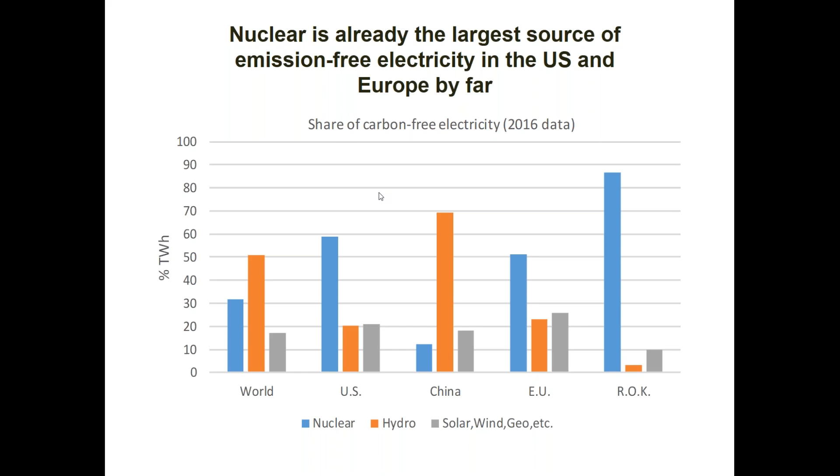anything like that. And you can see on a global level, hydro takes about half of the carbon-free electricity, followed by nuclear at about 1/3, and then less than 20% for solar and wind. But as I said, in places like the United States or Europe or even the Republic of Korea, nuclear takes up already a much greater fraction. So it is very much an important component of the carbon-free electricity mix right now. So let me move on.

It's interesting also to look at the correlation, if you wish, between the use of nuclear, hydro, solar, and wind to the carbon intensity in the power sector. So I'm going to define carbon intensity in a minute, but first, let me explain what you're looking at now. These are the list of European countries, and they are ranked according to the share of essentially solar and wind generation over a period of a little bit over 1 year, between 2016 and 2017. This is not capacity, this is actual generation.

Over that period of time, the average share of electricity from solar and wind in Europe was about 20%. That's the yellow line that you can see here. And there were 6 countries that were at or above that average. They are Denmark, Ireland, Germany, Portugal, Spain, and Finland. These, by definition, are the countries that have invested the most in renewable energy, particularly solar and wind.

The next plot here shows the same countries, all the European countries, but now they're ranked according to their carbon intensity. Carbon intensity is the amount of CO2, carbon dioxide, that is emitted per unit electricity generated. So the figure of merit here is grams of CO2 per kilowatt hour. And you can see that the 6 countries with the lowest carbon intensity in Europe are Norway, Sweden, France, Switzerland, Finland, and Belgium.

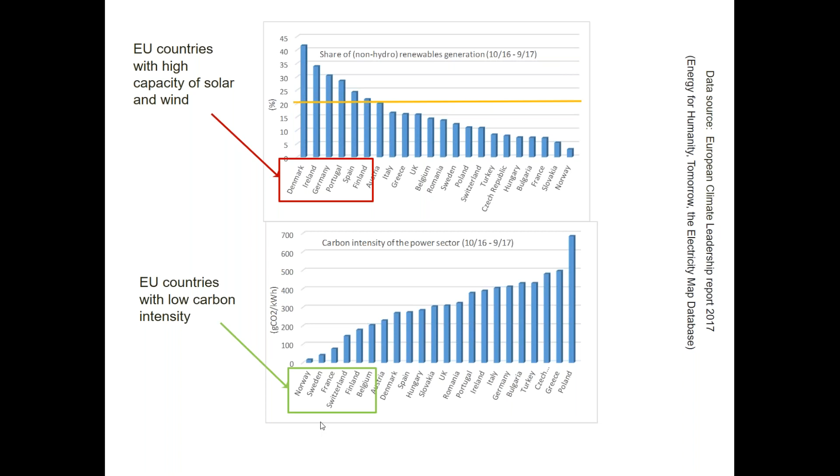So the message here is that, at least looking at Europe, which is an important experiment with many different energy policies, some completely at odds with each other, but with an integrated continental grid, the conclusion really is, looking at the data, that low carbon intensity correlates very well with the use of nuclear and hydro. The 6 countries that you see down here in green heavily use either nuclear or hydro or both.

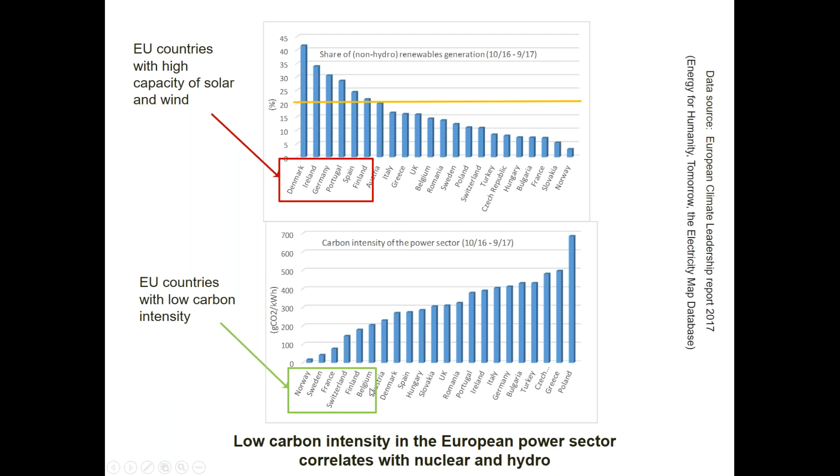Let me move on to the next slide. So we do have this fleet of nuclear power plants, and in many cases, these plants are approaching the end of their original license. You may know that nuclear power plants are typically licensed when they're built to last for 40 years. There is now a trend, I think, worldwide to extend to 60 years. That has happened extensively in the US. It's probably happening in Europe and in Asia.

And actually, here in the United States, we also have a few plants that may extend from 60 years to 80 years. But the question is always, once you get to this sort of decision point, are we going to decommission or are we going to extend the license? So if you decommission, there are certainly some downsides to this. The first is you lose the jobs and tax revenues that are generated by these plants.

This is particularly important for plants that are built in areas that are economically not particularly developed, particularly the states here in the US or regions of Europe. They place high value on the fact that nuclear power plants employ a lot of people. These are well-paying jobs, and they also pay a lot of local taxes. So you're going to lose that.

And we have examples here in the US and elsewhere of carbon dioxide emissions increasing if nuclear power plants shut down. In the US, we had, as of now, 3 or 4 plants that have already shut down: Vermont Yankee in Vermont and San Onofre in California. And when those plants were shut down, the annual emissions in the power sector of those states went up. This is fairly obvious to understand.

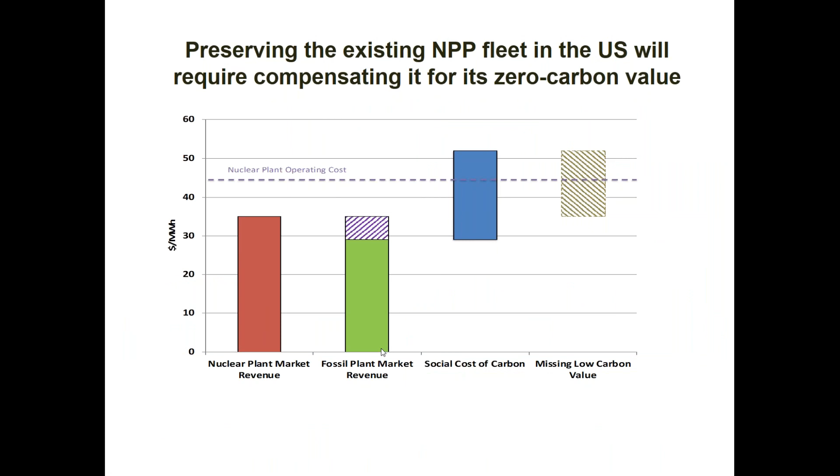This is the calculation for the United States. I'm not going to get into the details here. In the US, the issue is not necessarily the extension of the lifetime of the nuclear power plants, because in some cases they've already been extended by 20 years. The issue in the US is that many nuclear power plants, particularly in deregulated electricity markets, are losing money. Essentially, they're producing electricity at a cost that is slightly higher than the price of electricity in that market, okay? And so they are unprofitable.

So in the case of the US, again, without getting into the details of this graph here, we calculated that a credit, it's called zero emission credit, given to nuclear power plants in the amount of between $12 and $17 per megawatt hour would essentially make our entire fleet of nuclear power plants profitable, and it would allow it, therefore, to continue to operate for the next 20 years.

Similar calculations have been done by individual states in the US, New York, Illinois, and New Jersey. They have reached the exact same conclusions, and so in those 3 states, as of now, the nuclear power plants are actually receiving a small subsidy of between 15 and 20, I think, dollars per megawatt hour to ensure that they are profitable and they can continue to operate. This is done in the name of avoiding emission increases that would be certain if you shut down the plants and replace them, as I said, with other capacity.

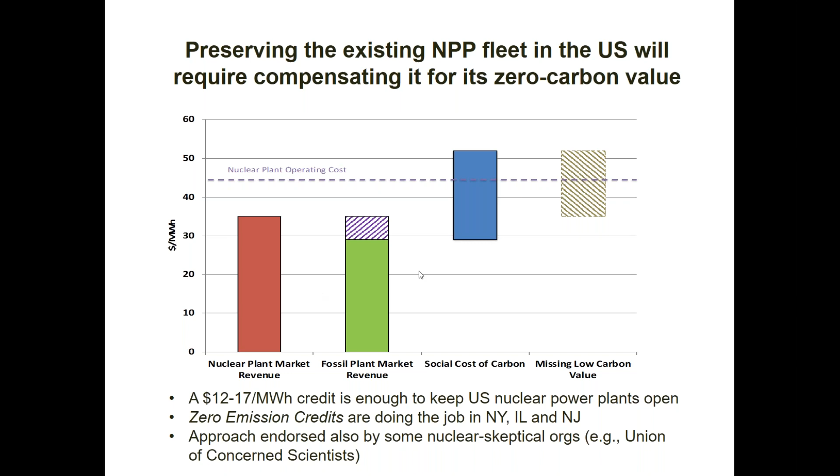So the discussion that we've had so far is about the existing fleet. Now, if you look down the road over the next 20, 30 years, the question is, do we need to build more nuclear? And so here we're now talking about deep decarbonization. You see, it's actually fairly straightforward, particularly for countries that start with a mix that is highly carbon intense. Emilia is from Poland. Poland uses a lot of coal. They have very high carbon intensity in their power sector.

For a country like that, simply switching from coal to natural gas will significantly reduce the carbon emissions. Significantly means maybe 30–40%. You can also bring some solar and wind capacity online that will further reduce the emissions. But if you are interested in deeply decarbonizing the power sector, which is very much needed if we want to ultimately address climate change, global warming, etc., then our analysis shows that you actually need more than just solar and wind, and certainly you need to ultimately get away also from natural gas and coal.

So let me explain what this slide is really saying here. The bottom line message is 3/4 of the way down the slide.

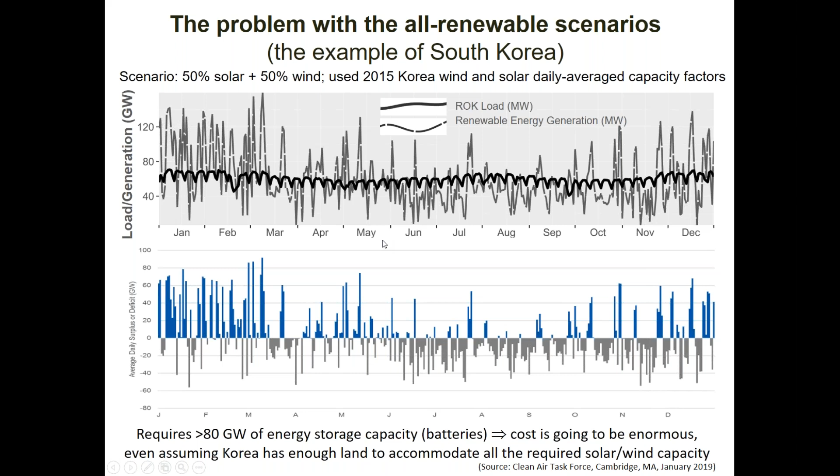Yes, hello. My question was about the comparison between decommissioning or extending the life of the nuclear power plants. In your opinion, if we start decommissioning nuclear power plants, will this push to build new ones, or will there be no correlation? I think in most cases there will be no correlation because the financial decisions are somewhat independent, but there are exceptions.

The two examples that come to mind are actually both in Europe. In the UK, the policy of the government is to replace nuclear with nuclear. So as the old AGRs, the advanced gas-cooled reactors that were built in Britain 30, 40 years ago, are coming to the end of their lifetime, they will be decommissioned, and that will automatically open the door to new construction in the UK.

And similarly in France, they have capped their total capacity to something like 56 gigawatts, maybe higher than that, I forgot. But there is a cap on the total nuclear capacity in France, and there too, for new nuclear plants to be brought online, the policy is that older nuclear plants have to shut down.

But with these two exceptions, in the United States, for example, the decision right now is whether to decommission or extend the license. The question in the US, at least as of now, is not, do I want to build new nuclear power plants? Because quite frankly, with natural gas prices as low as they are in the US, nuclear would not be cost competitive.

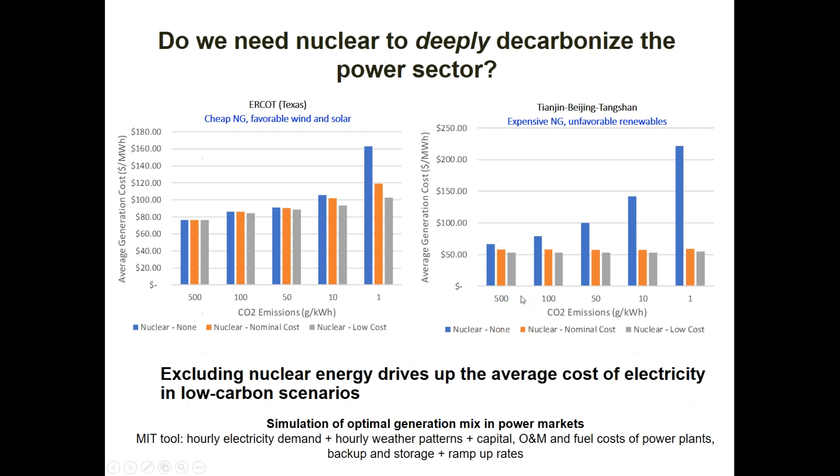I want to now tell you, this is going to be a little bit more technical. If we were to build new nuclear power plants, what would they look like? So this is the topic of advanced nuclear technologies. In the study, we analyzed essentially every new nuclear reactor concept out there. There are the so-called small modular reactors. They almost invariably are based on light water reactors, either PWRs or BWRs, but they're smaller and they can be built maybe in factories, which theoretically could reduce the cost.

And also from a financial point of view, it's a little bit easier to build smaller plants than larger plants because the capital and risk is lower. Fairly proven technology, even though it has not been demonstrated at this small scale extensively, but you're talking about PWRs, BWRs, so all the materials, fuels, and components are essentially proven from decades of operations in existing plants. So that's the first category that we looked at.

The second category would be the Generation 4 systems, and in our evaluation, of the six or more different concepts that people are investigating within the Gen 4 group, the one that has the most promise and is basically ready now is the high temperature gas cooled reactor. So this is a very different beast from PWRs and BWRs. The coolant here is not water, it is helium. The fuel is not uranium dioxide in pellets with zircaloy cladding. It's actually so-called TRISO particles.

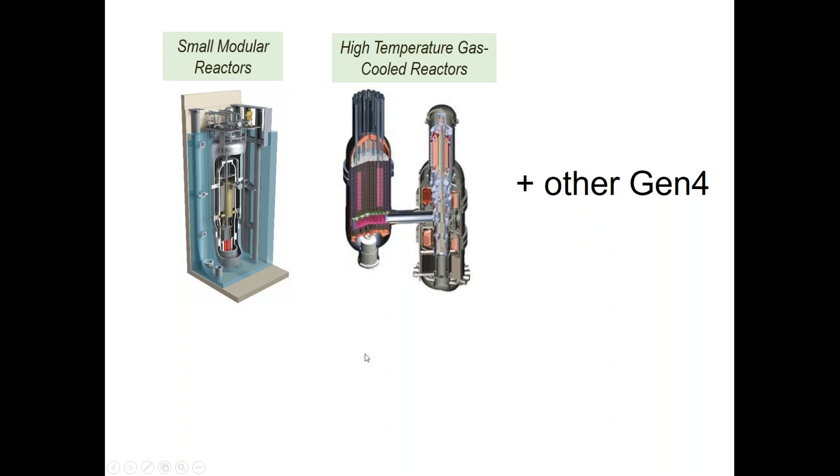So our analysis is focused mostly on these two groups. Now, traditionally, you know that nuclear has been used for baseload electricity. Pretty much that's the only application that we've seen other than propulsion in naval reactors, submarines and carriers. But in the civilian domain, they've been used for baseload electricity.

What's interesting and exciting about these new technologies that are now being considered is that they offer or they open up a richer set of potential missions. So you still have, of course, cheap electricity generation. Because of the presence of renewables, all new nuclear power plants are probably going to be expected to be flexible operation capable, which means being able to follow the load to an extent.

But what's interesting in particular about the high temperature gas reactor is that now you can think about coupling a nuclear reactor not just to the electric grid, but also use the heat at high temperature for industrial applications. And so things that come to mind could be the production of chemicals that require heat at 500 or 600 degrees C, or even the production of synthetic fuels for transportation.

So hydrogen is being considered, of course, for fuel cells, cars, and hydrogen is not a primary energy source, so it has to be produced using a primary energy source, and you could do it with nuclear, but it's done efficiently if you have a nuclear reactor that operates at high temperature.

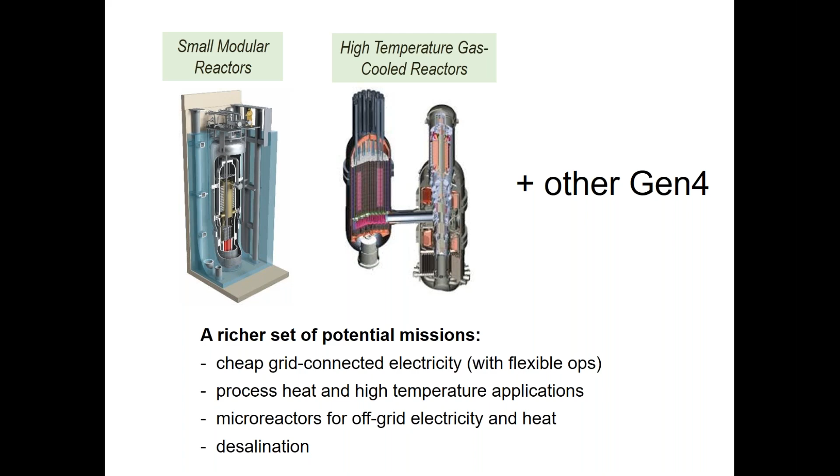We did look at the nuclear heat potential in the United States. You can see here a list of applications: refineries, chemicals, minerals, pulp and paper, and others. And we used several filters, I call them. Essentially, we look at the EPA, Environmental Protection Agency database for U.S. sites, U.S. sites that would emit a certain amount of carbon per year. Sites that would require a significant amount of heat, say 150 megawatts, and we made the assumption that nuclear heat could be delivered at maximum 650 degrees C, which is consistent with a high temperature gas reactor technology.

And basically by applying these filters to all sorts of industrial plants in the United States, we found that nuclear could capture today about 150 gigawatts of heat, which is significant. It's a relatively small fraction of the total heat market, but it is significant in absolute terms. And again, this does not include the use of nuclear for synthetic fuels or hydrogen for transportation. In that case, you would need a lot more than this. But it was interesting to see that even now, nuclear could penetrate these heat markets quite effectively.

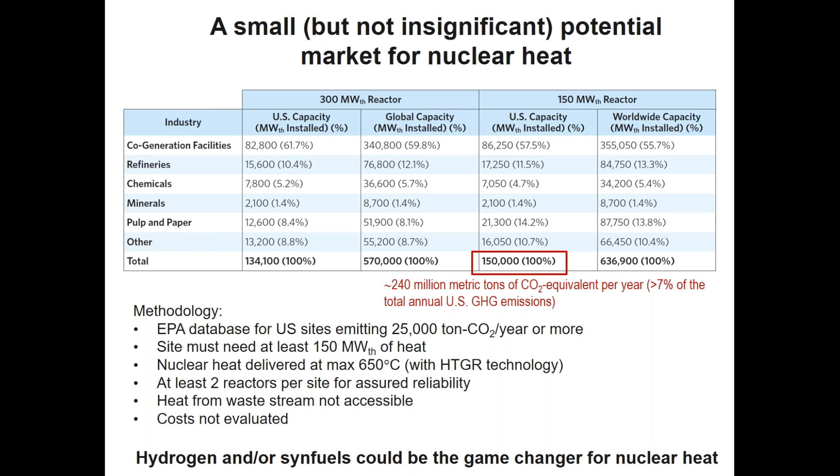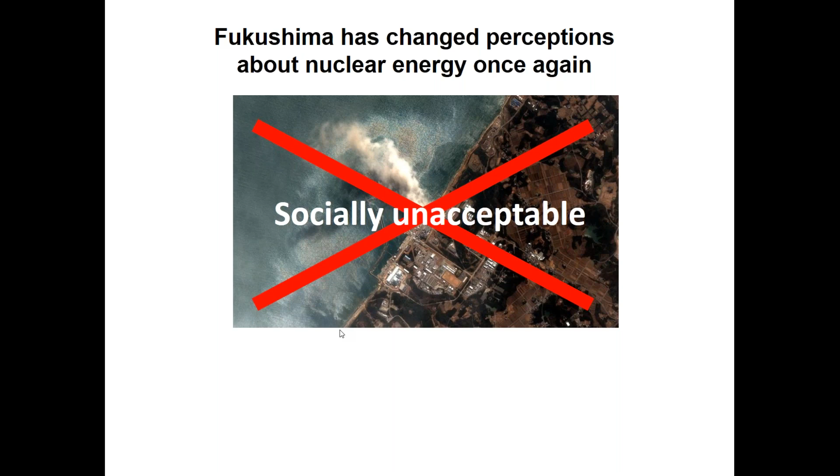But from a social point of view, the disruption has been massive. You may know that about 200,000 people were forced to evacuate. That was not a good decision, but it did happen, and it has turned a lot of people against nuclear. So going forward, as we design new technologies, I think we have a new set of goals in the area of safety.

For the existing nuclear power plants, let me say a couple of words about those. For the existing fleet, the big lesson learned from Fukushima was that you have to be able to cope with a station blackout without damaging the core. And there has been a lot of activity in retrofitting existing plants with additional equipment and additional energy sources that would allow to basically extend the coping time for a station blackout at the existing fleet, and that is taking care of at least the existing fleet.

But as we look now at these new designs, I think you want to be able to demonstrate that there is no need for intervention from operators for infinite, I put it in quote, for a very, very long time during a station blackout. And even more important is you need to be able to show that even if there is a significant accident or severe accident, as we call it, the need for evacuation of local residents is eliminated. And what it really boils down to is how effective the system is at retaining the radionuclides that are released or that are present during severe accident.

So the two options that I mentioned, the high temperature gas reactor and the small modular reactors, actually do bring a very, very interesting safety profile to the table. So they all have what we call inherent safety attributes. In HTGR, there is no coolant to boil, so you don't run out of coolant because it cannot boil off. The fuel, this is absolutely key. The fuel has very, very high retention of fission products, even under the most horrendous postulated events.

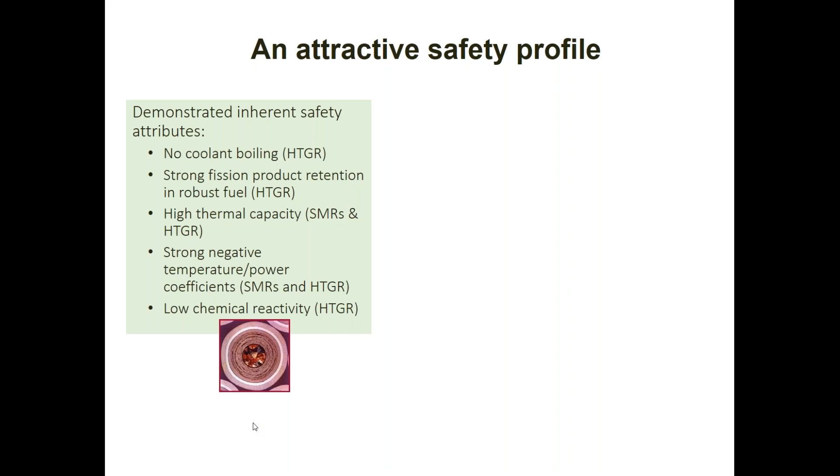There is a very high thermal capacity in the core or in the system for both small modular reactors and high temperature gas reactors. So the system is able to absorb a lot of heat without exceeding temperature limits. And the reactivity coefficients, sort of the inherent neutronic features of the reactors, are such that the plant shuts itself down if something goes wrong.

If you couple that with engineered passive safety systems that do not require AC power and other intervention from outside, we concluded that these new technologies basically allow you to eliminate the need for emergency power, at least safety grade emergency power, and extend the coping times for station blackout enormously. They are all much simpler to operate, which is good in terms of reducing the number of initiating events.

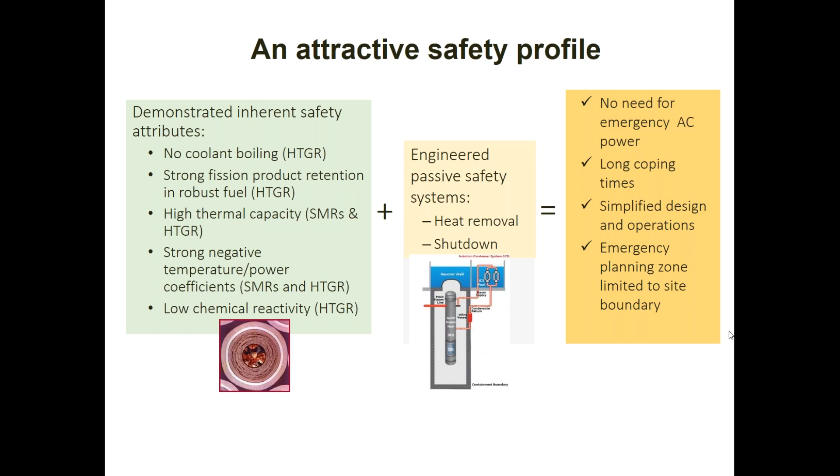And last but not least, the source term of radionuclides is such that even under severe accident scenarios, we think that the emergency planning zone, so-called evacuation zone, could be limited to site boundary, which means by definition, local residents will not have to be evacuated. This set of attributes has been discussed in the US with the NRC. The NRC is our nuclear safety agency.

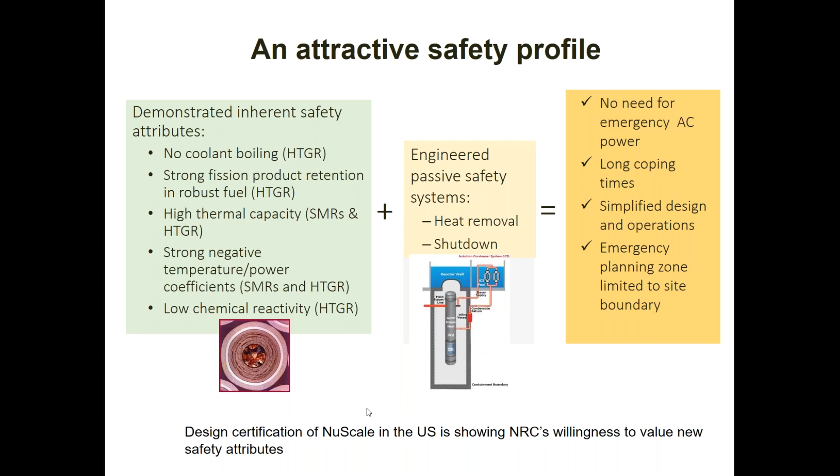Within the context of the design certification of NuScale, NuScale is a small modular reactor based on PWR technology. And the NRC is indicating a very strong willingness and openness to value the safety attributes of these new reactors. So I'm hopeful that within a couple of years, we'll have a design certification for NuScale here in the US that essentially recognizes these good attributes for these new technologies.

Let me come to an end by telling you a little bit about how to reduce cost of nuclear going forward. I showed that economic analysis at the beginning. It makes certain assumptions about the cost of new nuclear. There was a question about construction and decommissioning. They're all included, but of course we had to make some assumptions on what those costs are. And the current practice in the US and Western Europe, if you look at some of these new construction projects, they are too expensive. They're taking too long to build, and even once they're built, they're just very, very expensive.

So we spent a lot of time in the study trying to identify ways to reduce the cost of new nuclear. And some recommendations are obvious, others are less obvious. So let me just very quickly walk you through this. The first is kind of obvious. A lot of the cost of nuclear is about re-engineering the plant for site-specific requirements. The plant is nominally the same, but if you change site, you're going to have to do different engineering. And often they're built in 1 or 2 units at most at a site.

So the first recommendation is standardize, and build multi-unit sites. The more units you can build at the site, the better. From an economic point of view, there is very strong evidence that the first time the workforce builds the plant, it takes a certain amount of time, a certain cost.

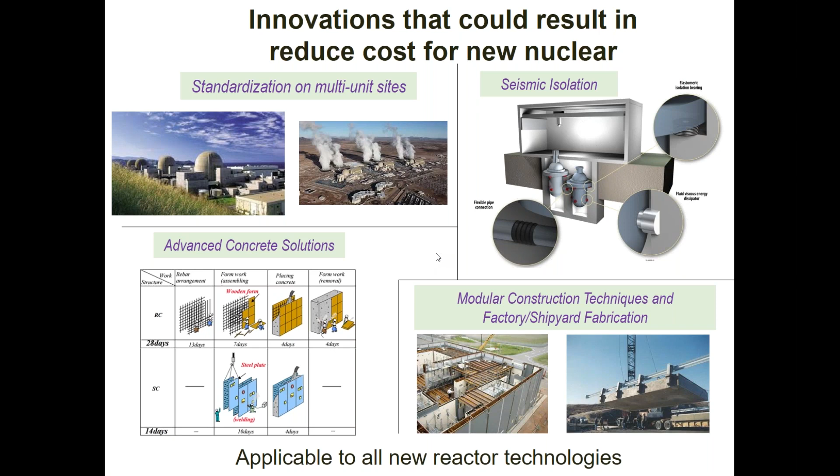And we found out that that trade-off is in your favor for virtually every site with a peak ground acceleration above 0.2 G, which essentially is almost all sites worldwide. So what's interesting about these recommendations is that they are applicable to all new reactor technologies, whether you like PWRs, BWRs, high temperature gas reactors, sodium, whatever it is. These are recommendations that you can use in all those cases, and hopefully the cost will come down.

Okay, I already said this, so I can skip. And let me just close with, let me see, this is the last one. Okay, let me close with this one.